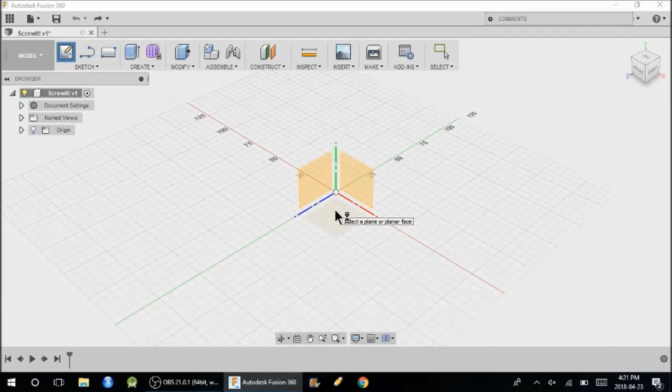Now let's get started. I want you to do several commands. First, we need to click on the create sketch command to create a new sketch on the program. Pick the bottom plane to start your sketch. You can pick the others, but for now I'm going to pick this one. If you're using this as a reference, then I suggest you do the same and experiment later.

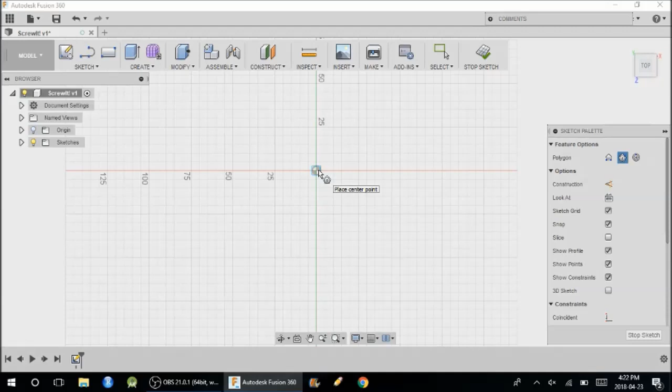Also, don't mind any warnings, they happen from time to time. Just work around them and you should be fine. Now go to the Sketch tab and pick the Circumscribed polygon from the Polygon section. Use the origin as your starting point and go up 25 millimeters with 6 sides on the polygon. The 6 sides should be the default if you have not changed it.

If you have different measurements, you can either calculate the difference on your own and apply it, or change it on Fusion 360. To change it on Fusion 360, go to your name on the upper right side, click it, select Preferences, select Design, and click and pick the measurement.

If you want to 3D print or simulate your drawings, then also click and change the CAM and simulation measurement settings as well. Once you're done with your 6-sided polygon or hexagon, create a circle by going to the Sketch tab and pick Center Diameter Circle, or by typing C. This may be different if you're using Macs.

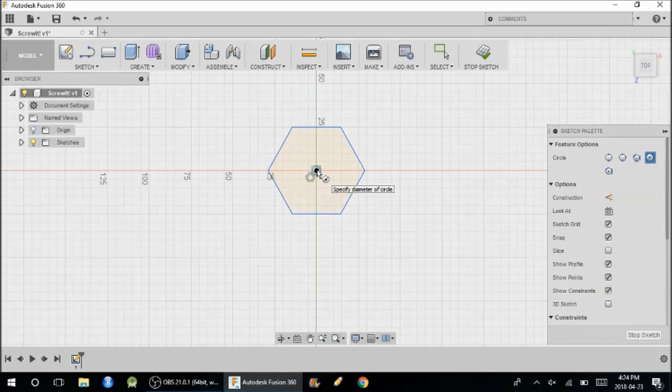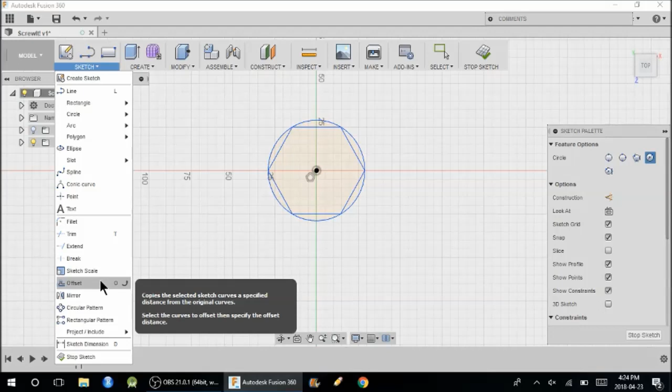Use the origin as your starting point and choose one of the points of the hexagon as your endpoint. Now that you have your circle and hexagon, you're going to offset them. To offset, you can go to the Sketch tab and pick the offset option or type O. Select the circle and offset it 20 millimeters away.

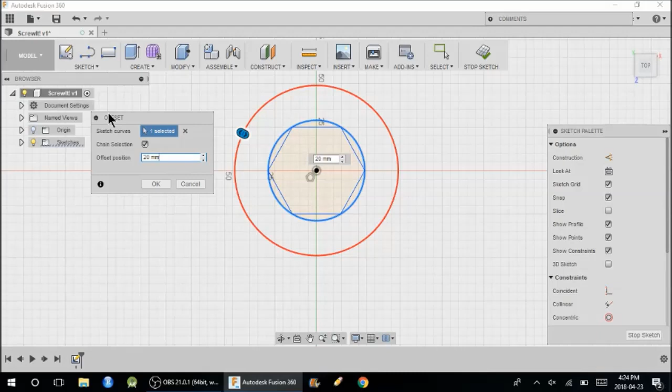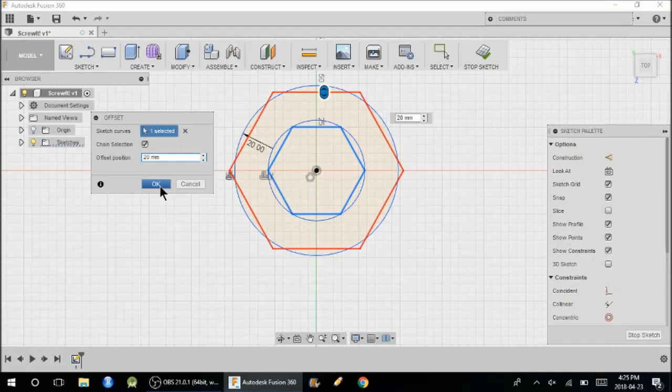Then use the offset command again on the hexagon and offset it 20 millimeters away. Now select all the lines and copy them. Either use Ctrl C or right click and select copy. Do not select the move copy command or type M. Of course, before that, you need to delete the dimension lines.

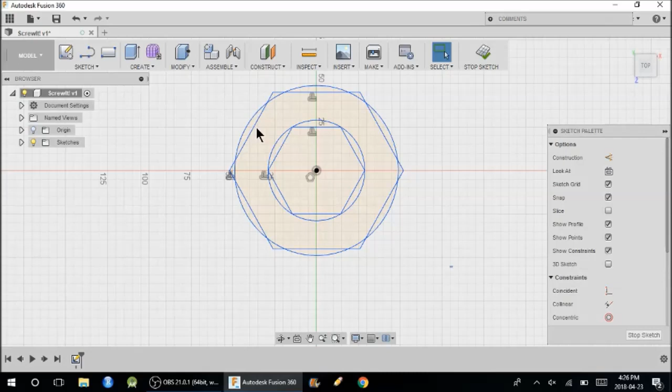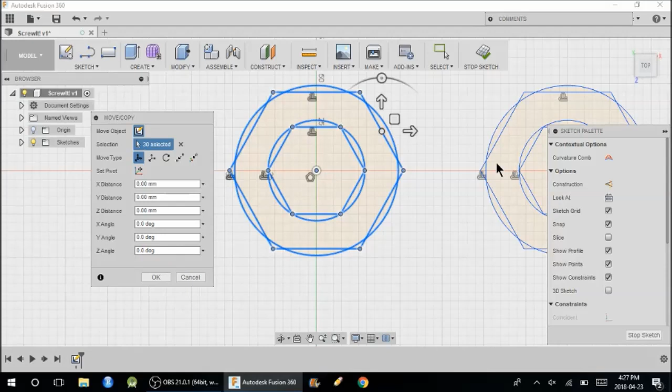After that, Ctrl V or right click and select paste. Use the arrow that is on the plane that goes right and left, and move the lines right 150 millimeters. Paste again, and select the same arrow, move it 150 millimeters, this time left, or in the opposite direction.

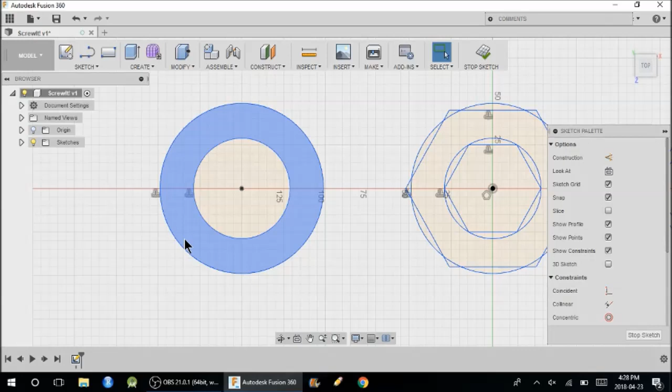Now on the left lines right here, delete the hexagons. On the middle lines, delete the big hexagon.

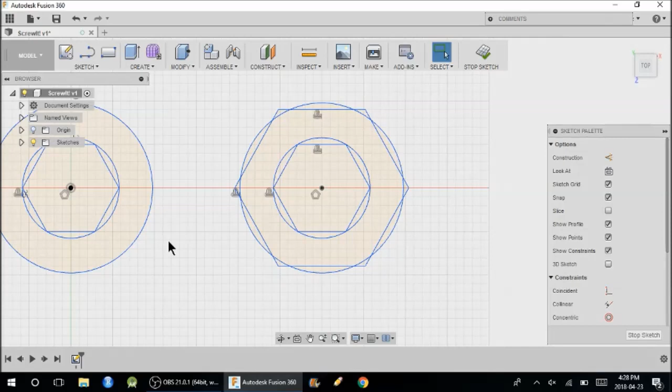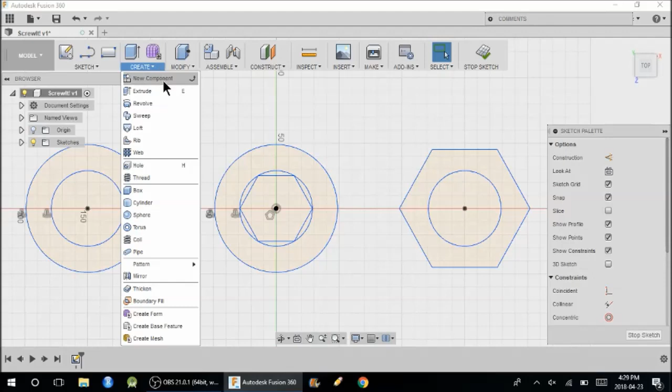Lastly, on the right lines, delete the big circle and the small hexagon. I am now done with all the 2D lines. Now we are going to create the bodies of the design. Go to the Create tab and select Extrude. Or you can just type E. This command is going to be used quite a bit now.

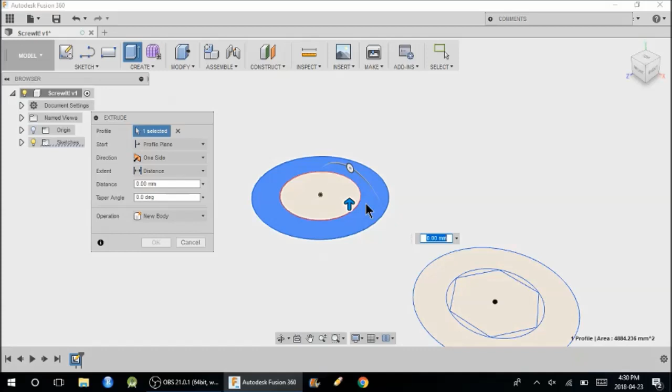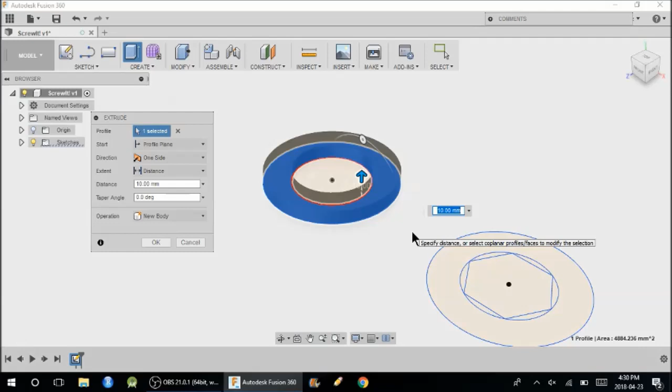On the left lines, pick the middle of the circles. After selecting the Extrude command, go up 10 millimeters, or 10 millimeters tall. This is a body that will become the washer. Now your sketch is going to disappear. It's normal. What you do is go to this arrow right here and select the off light bulb on sketch 1. And voila, they're back.

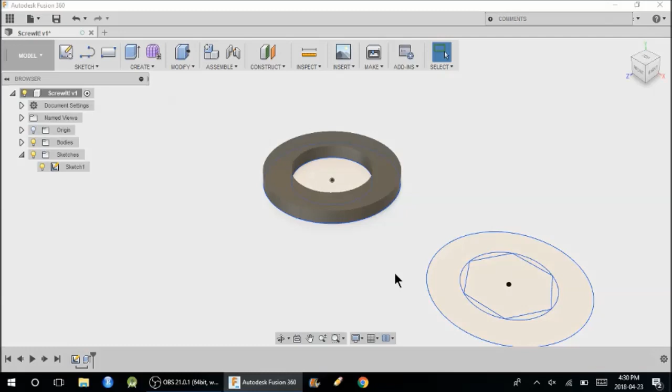Now go to the middle lines, select the Extrude command, and pick the space in the hexagon and in between the hexagon and the circle. It should be about 7 spaces in total. Now select the arrow sticking out and raise it up. Make sure it is 150 millimeters tall and hit OK.

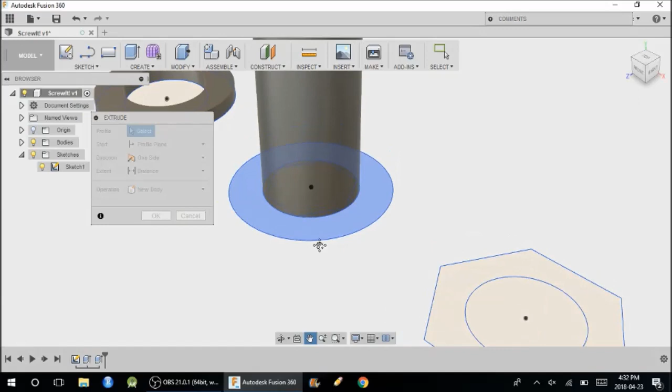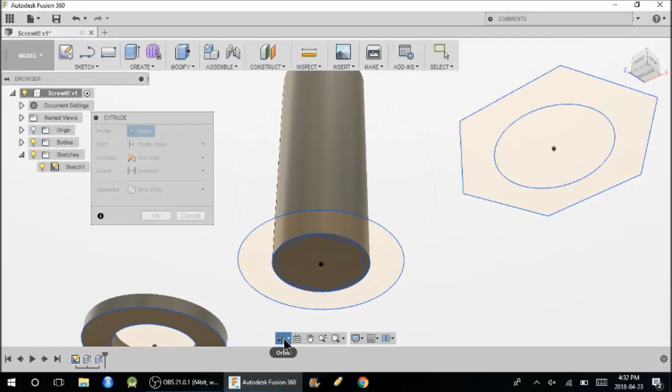Now select Extrude again and select the spaces in between the hexagon and the circle and the space in between the two circles. What you could do to select those spaces is either turn off this body right here, or if you hit Shift and the middle mouse button, you could orbit. You can also orbit by clicking this button, like so, and just click it again, or just hit Escape and you shoot back.

So you select the spaces in between the hexagon and the circle, and the space in between the circles. Now, select the arrow sticking out and pull it down 50 millimeters below, or the opposite direction from the previous body.

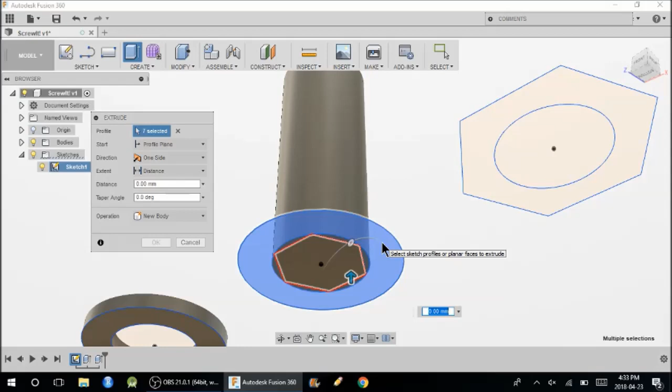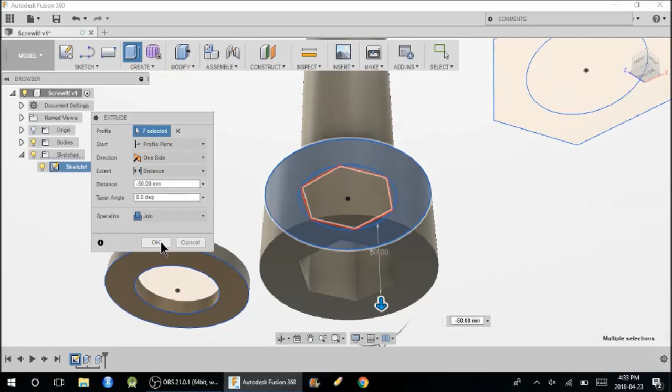Before hitting OK, on the box, make sure the option Join is selected and not any other selection. This should be on the operation and it should be Join. Hit OK. You should have two bodies now. 1, 2.

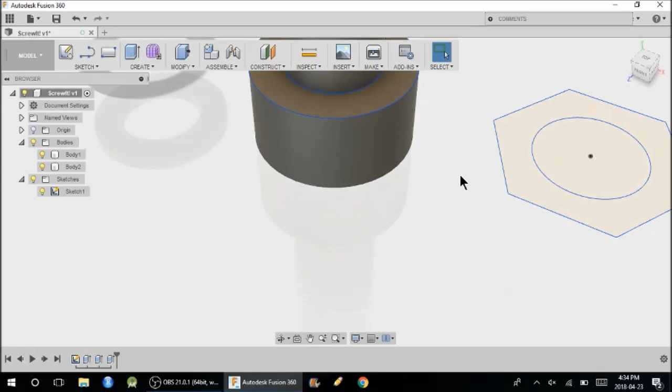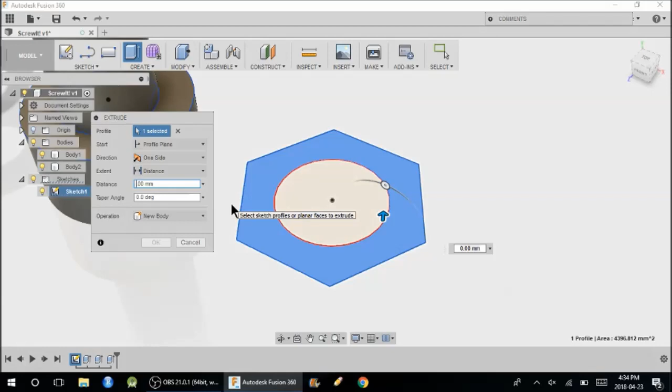Now go to the right lines, select the Extrude command, and pick the space between the circle and hexagon. Select the arrow and move it up. Make sure that it is 25 millimeters tall before hitting OK. Now we should be done with creating all of the bodies or objects.

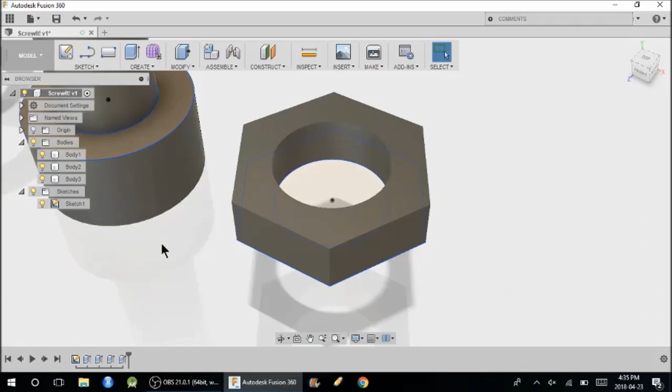Now if you cannot see it, the left body is the washer, the right body is the screw nut, and the middle body is the hexagon thumb screw. With that said, we need to make the threaded parts of the screw and nut. You can leave the washer alone.

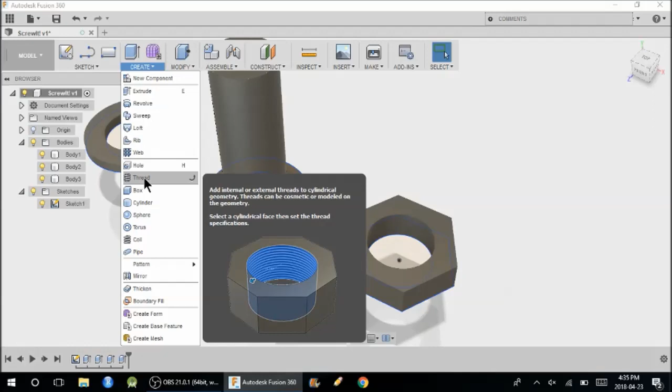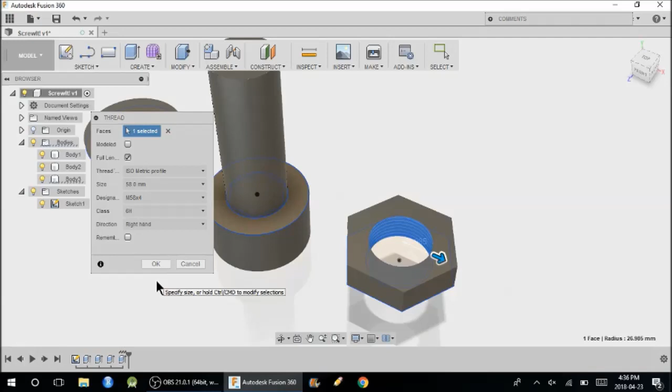First, we're going to concentrate on the screw nut. Go to the Create tab and select the thread option. Now select the middle part of the nut. Leave the default options alone. They can be a discussion for a different video, if you guys comment it or I decide to create one. Once you hit OK, on the box, go to the middle body.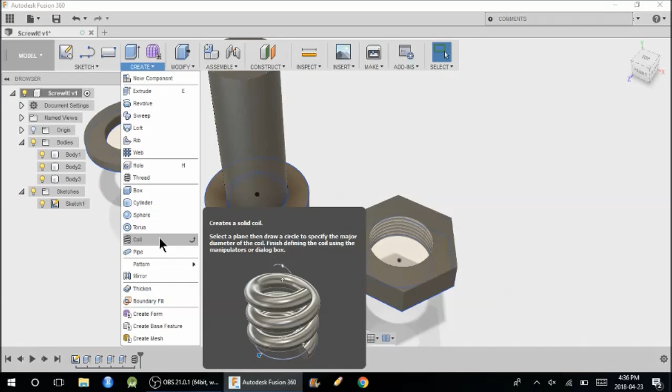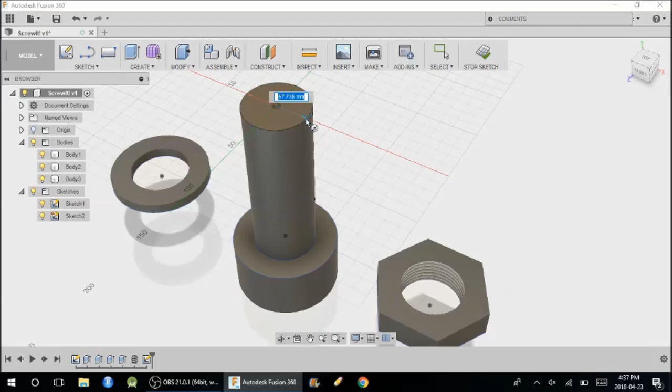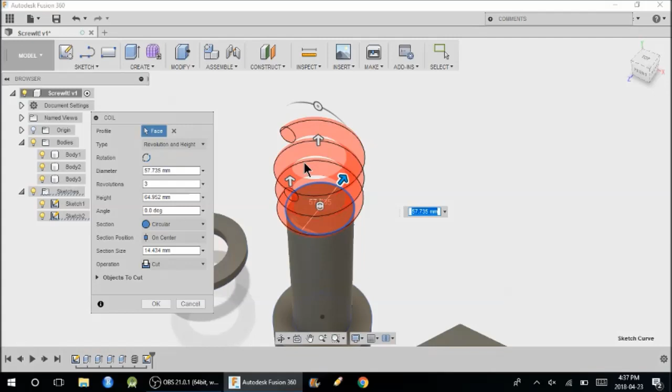Go to the Create command and select the coil option. It's going to ask you to pick a plane. Select the top part of the thumb screw. Select the origin as your first point and the height of the thumb screw as your end point or second point. You may need to zoom in a bit to see the coil, or zoom out. Pick the middle arrow and go down 150 millimeters.

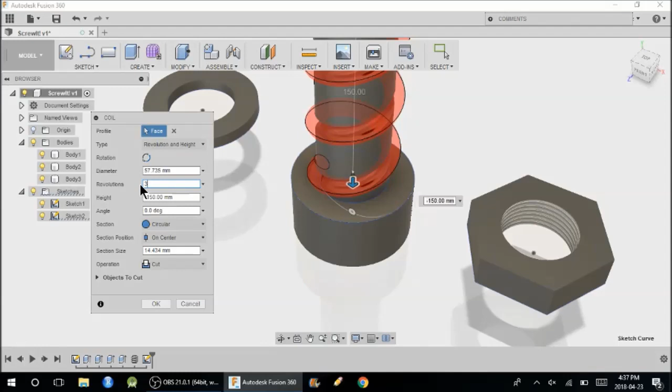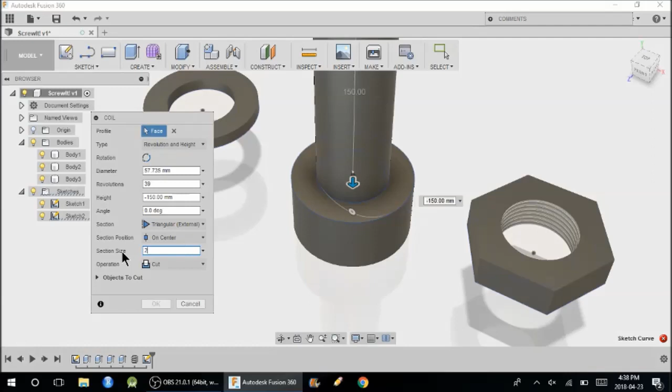Now on the box on the side, you need to make sure the revolutions is 39. Section is triangular external. Section size is 2.5 millimeters. And operation, it's cut. Leave the rest as default options. You may need to change any number of these options so it could work on yours. The way I got mine set up is by experimentation. Now hit OK.

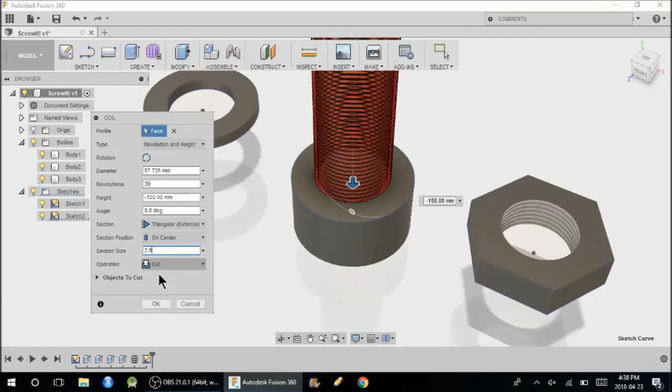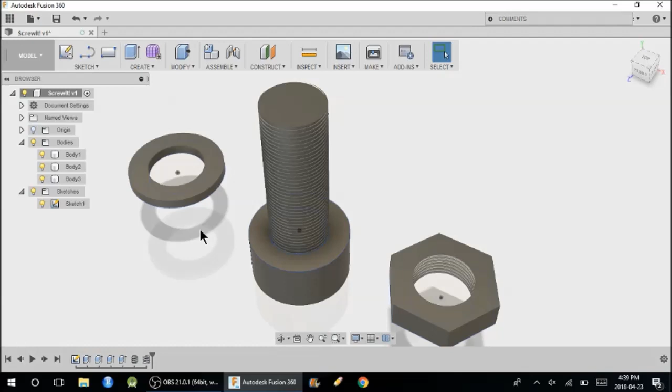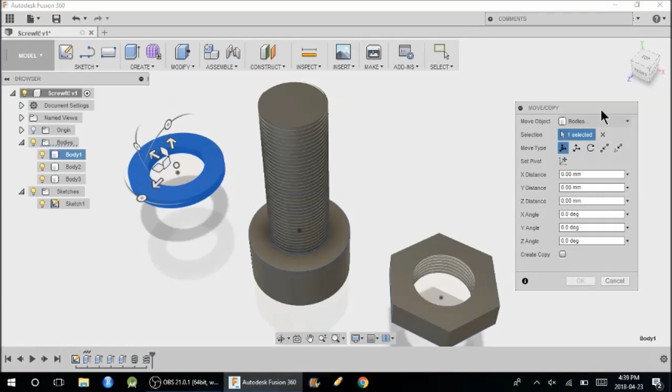Next is to align the bodies. The main body you are going to keep is the middle one. In that regard, select the body on the left and select the Move Copy command. The Move Copy command is on the Modify tab. You can also type M to use the Move Copy command. Now use the arrows to move the body to the right and above the middle body. You may need to experiment with this, but for my case it's 150 to the right, and I'm going to put it 160 above, and I'm going to hit OK.

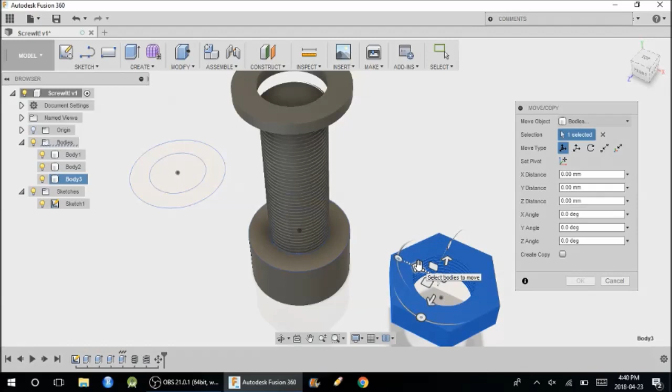Use the Move Copy command again to move the right body to the left and above the washer. So again, 150. This time, instead of 160, putting it 200 actually, and hit OK.

Now on the left hand side of the screen, you should see a little browser. Sometimes it'll be like this. Make sure it's expanded. On the Bodies tab, make sure it is also expanded. If it's not expanded, just hit the arrow and it will expand or contract. Now before we get onto this, go ahead and click the little light bulb for sketches. This time you need to make sure that light bulb's off. What the light bulb does is just turn on or turn off the subcategory.

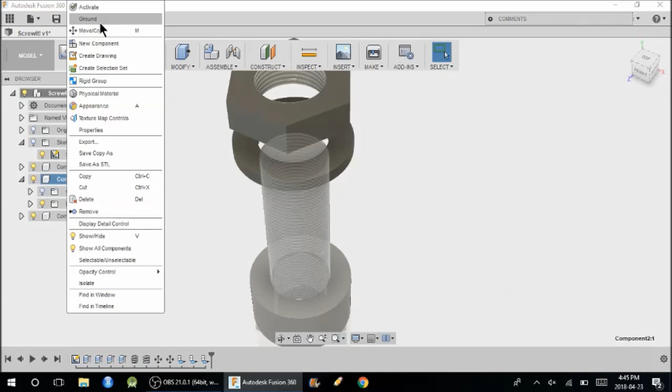Now right click on body 1 and select Create Components from Bodies. Go ahead and repeat this for body 2 and body 3. Now that you have your components, right click on component 2 and select Ground. That is, if you can find it. It should be the second object. You should see this little pin on component 2 now.

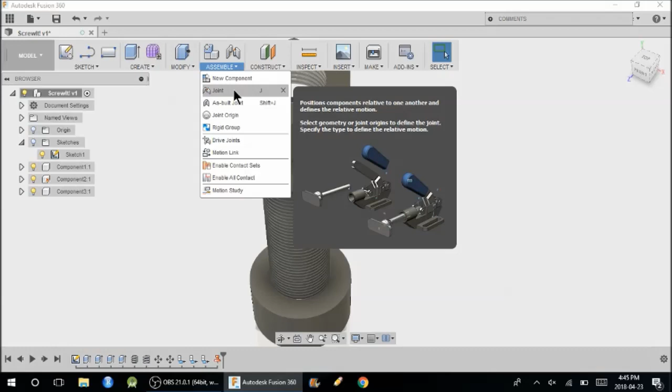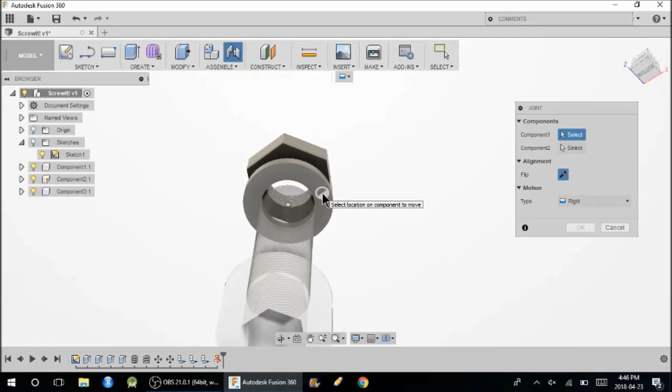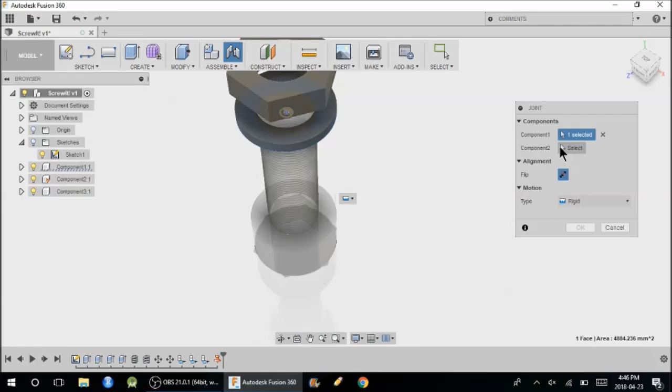Go to the Assemble tab and select the Joint command. You could also type in J. Select the bottom part of the washer. So we're going to orbit, pan a little bit, get out of pan, select the bottom part of the washer, then select the flat part of the thumb screw that is on the base where the screw begins. And I'm going to show you that right now. Go back up, get out of that. Select component 2. This is going to be right here, right at the base.

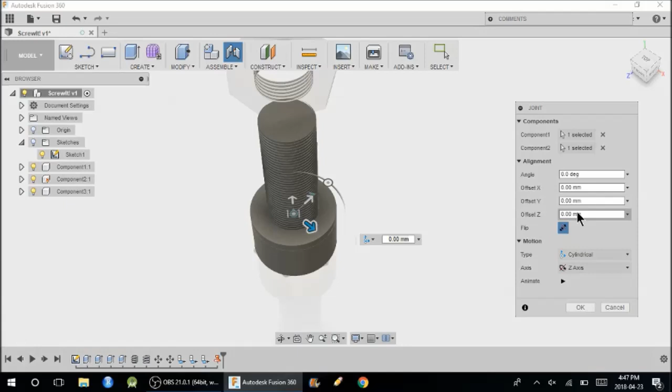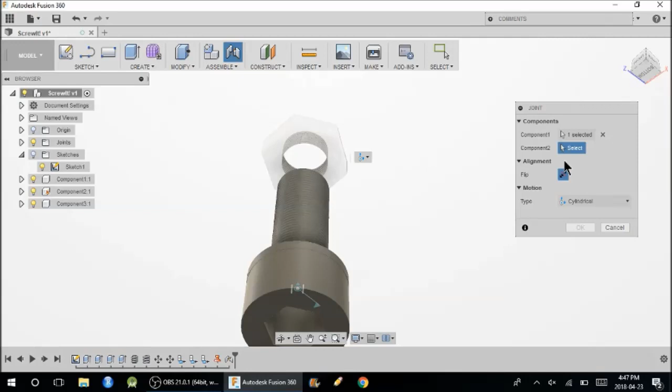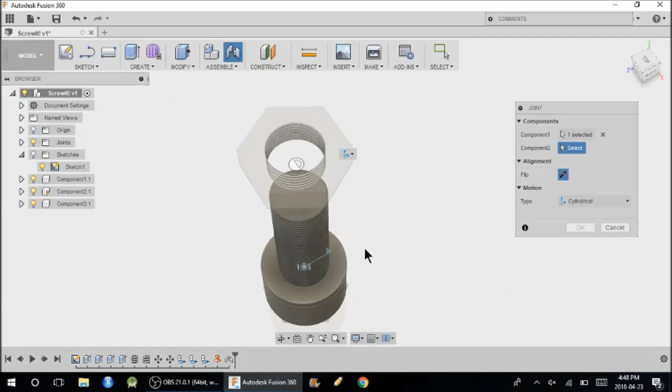You should see the washer move in the box. Leave everything in default options except the type. Change it to cylindrical. You guys are going to see the reason why right now. Then hit OK and select the Joint command again. Now select the bottom of the screw nut. You just need to make sure that you select the right part of the bottom. And for component 2, you need to make sure that you select the top part of the washer. Make sure that the type is cylindrical and select OK. You are now done with your objects.

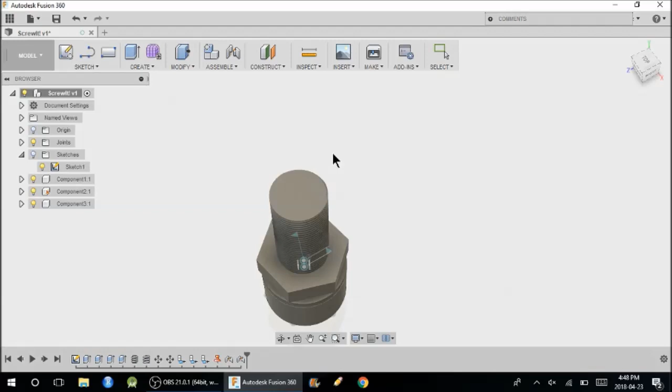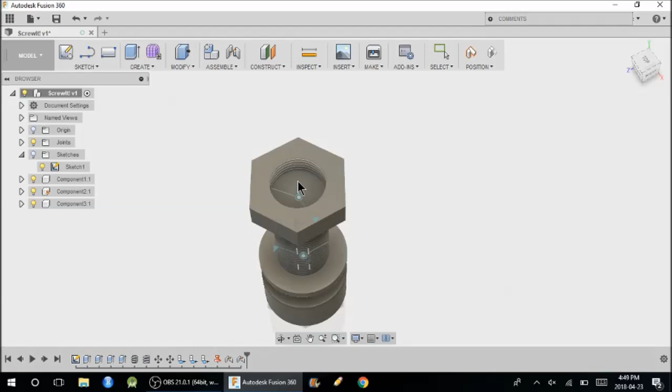Now, the reason why I said cylindrical was that now if you select one of the objects, you can move it up, and you can also rotate it. So this is the same with the screw nut and with the washer. When you move the washer, the screw nut rotates with it. Now with the thumb screw, it does not move at all. This is because you have it grounded.

If you want to color your objects, the command is Appearance in Fusion 360, and it opens the Appearance box. To open the Appearance box, either go to the Modify tab and select the Appearance option, or you can type A on your keyboard. Now select your colors, one for each body, by selecting the color and dragging it either to the physical body or the name under the browser. These are my colors, but you can choose the colors you want on your objects.